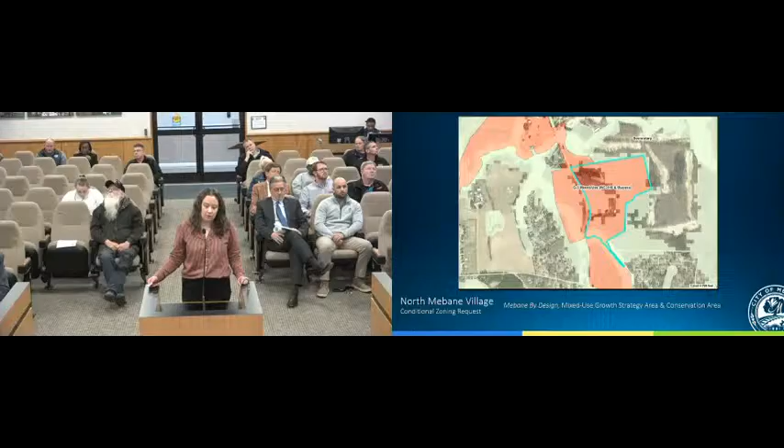Our comprehensive land development plan identifies the area in a mixed-use growth strategy area, which would support both commercial and residential components, and there is conservation area on the site as well. Our current comprehensive plan identifies conservation area based on contiguous forest cover and the presence of a stream, conditions that apply to this property.

As a conditional zoning request, a site-specific plan does carry with the rezoning, and that site plan is included in your packet with screenshots in this PowerPoint.

The planned unit development includes 192 townhomes, 36 single-family detached homes, and approximately 15,000 square feet of office retail space.

The private recreation, primarily associated with the residential component, includes pocket parks, a multi-purpose field, natural trails through area that's being preserved, and a pool and playground amenity. More than 23 acres of private open space is shown on the site plan.

Related to public recreation, the developer will be contributing to the public multi-use path network that's emerging in this area, connecting to the Potter's Mill development over the creek, to Preserve at Mill Creek here, and then also along this main road, continuing the multi-use path along North First Street.

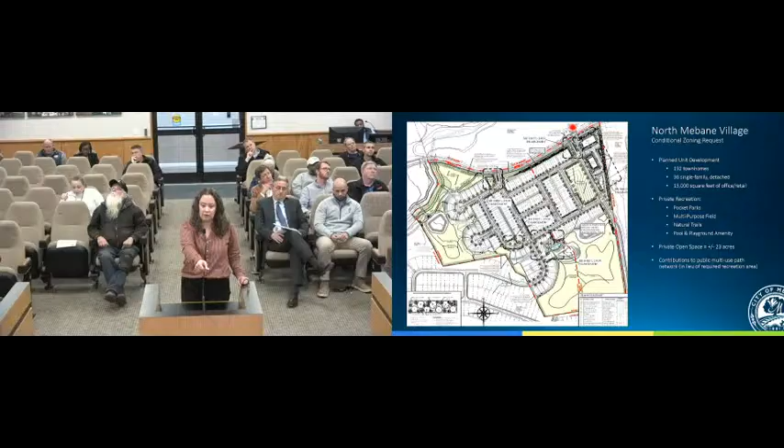There are conditions associated with the site-specific plan, including reduced setbacks for the sides of the townhome and single-family lots. The townhome setback is requested to be reduced to 3 feet. However, the applicant will maintain a 20-foot separation between the townhome buildings, consistent with our typical standards for standalone townhome developments. For the single family, the side setback minimum is requested to be reduced to 6 feet, and our standard is 10 feet.

Additionally, with the planned unit development, we have a standard that says the perimeter setback between the non-residential component and any adjacent residentially used property should be 150 feet. The applicant is showing a reduction in that; however, they are maintaining the required landscape buffer and are proposing to enhance it. Additionally, they have included a list on the cover sheet of the site plan that restricts the non-residential uses on that portion of the property.

Finally, the applicant is showing a 50-foot wide streetscape along North First Street, which is greater than what would typically be required. A traffic impact analysis was required of the developer, which was reviewed by city staff and also the North Carolina Department of Transportation.

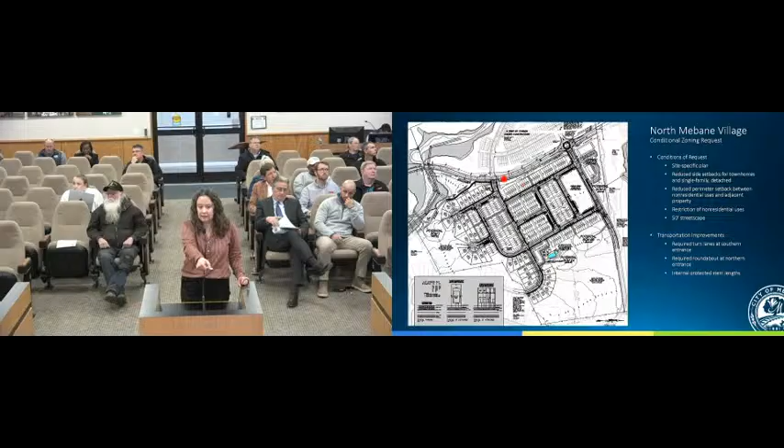They are required to make improvements at both entrances with turn lanes, both left and right, at the southern entrance, and then a roundabout on North First Street here at the northern entrance, which would be done in coordination with the adjacent developer for the Preserve at Mill Creek.

The NCDOT letter also includes some information about internal protected stem lengths, which would allow for driveways not to inhibit turning cars into the development.

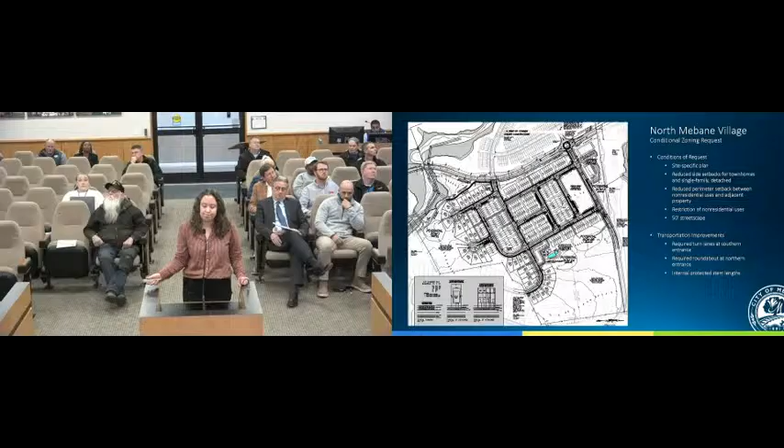Are there any questions for me?

So in the packet, under the streetscape, it mentions they're proposing a 50-foot streetscape, but it says the UDO requirement is a minimum 20-foot semi-opaque streetscape, but I think you mentioned 100. Can you clarify that for me? Oh, they're proposing 50 and our requirement is 20. If I misspoke, I apologize, but what's written in the packet is correct. So they're in excess of our requirement. That's correct, yes.

On side setbacks, you indicated they're wanting a reduction to 3 feet, but they will still maintain 20 feet — I guess 10 feet on each side of the property line. How's that monitored, just by the construction plans? With every townhome building that's permitted, we require a separation to be shown between the adjacent building. So we will look at it in construction plan review through the technical review process, and the planner assigned to review the zoning permits for each building would also be looking for that condition. It's a little unusual to hear a request for a 3-foot setback, but actually the townhome will be set back 10 feet from the property line. The property line will be different — it will be set back 3 feet from the property line, but there will be common area in between the two properties.

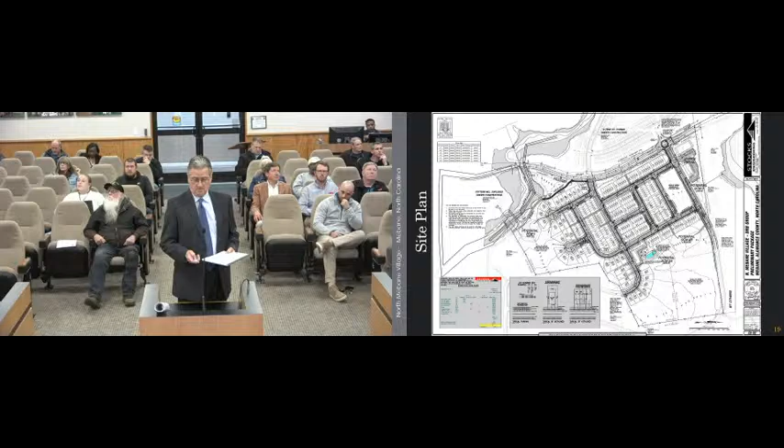So let's go through these. There's the site, which Ashley has already gone over, I'll back up to that one. This particular one, you can see where we're connecting the sidewalk and the multi-use path system here to Potter's Mill. That location was selected because the floodplain goes down right there, so we're building a bridge across that stream, connecting up through the development and out to 119, where it will reach back up with another one from the northern side of the preserve and ultimately out to the park. So it's creating a large link getting people from downtown out to the park. We're excited about that.

There's a fee based on number of units between the developers out there to get that section of it done.

As Ashley mentioned, this is conditional rezoning. Mr. Bradley, as far as your question about the townhomes, the townhomes are the same width apart, with a 3-foot setback off of each one, and the remainder of that section in the middle will be common open space. This helps the homeowners association maintain what's in between buildings. It'll be a landscape maintenance package for all the townhomes so they're maintenance free for the homeowners, all their landscaping, yards and everything taken care of. So it just helps the homeowners association manage between the buildings. That's what that one is.

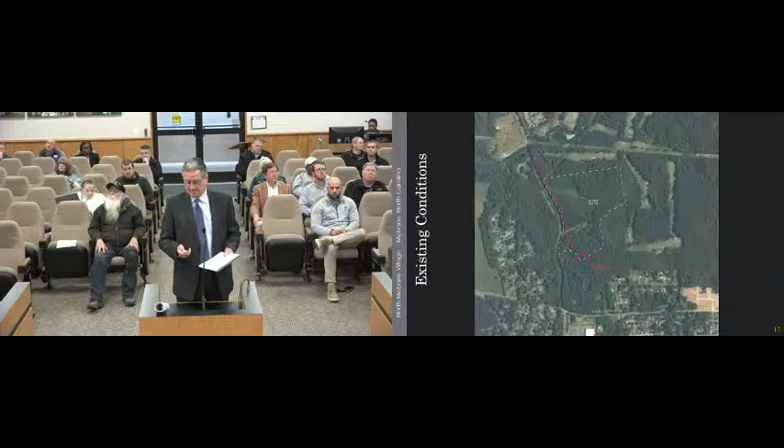We had a request to reduce the buffer width of a PUD, non-residential to residential properties on the outside. That was something picked up from the previous plan with a similar situation there, but again we've pared that down. We don't have as many uses available, so it's a smaller list, and some of the uses are restricted to help keep it more of a neighborhood service-oriented type commercial that will help, since there's going to be a lot of people coming out through the street to 119 North First Street.

As you can see by this plan, one of the other items listed in the comprehensive plan, besides being mixed use, is a conservation type development with higher density, but what that allows for is all the green space you see around the outsides. This is about an 8-acre plot where we're going to have some natural walking trails, tied into the amenity area, which will be a swimming pool amenity available to the townhomes across the street under the same HOA. Then there's another large section down here where we also have some trails that'll tie into the multi-use path as well.

We've got some pocket parks located one here, and there's another one here. The main open space in the development is a large green space here, which is larger than a football field. I think it's 180 feet wide—a football field's 160 feet wide—and it's over 400 feet long, so that's a very significant open space there.

We feel like if somebody comes along, if there's a coffee shop here or something like that, they can walk across the street and sit in the park area. So they would feel like those uses will go well together.

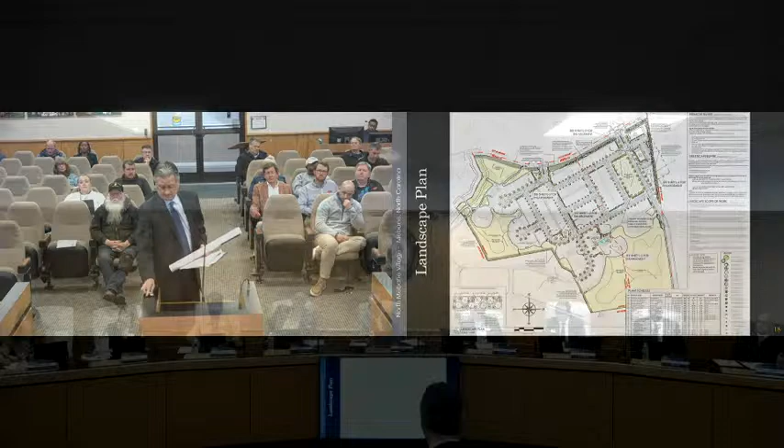So you referenced the restricted uses on the non-residential space. Are you able to give a quick highlight of what the allowable uses may be? I think there's still quite a few uses available, but we're looking for a coffee shop or a yoga studio, or might even be a spot for a daycare in there, or something that would be neighborhood service kind of uses that people can walk to from the preserve, or from Potter's Mill, or from across the street, or even Mill Creek, and be able to walk down there. It's not a great deal of mixed non-residential commercial, but it doesn't take much to get somebody interested in being able to walk to something that they can take part in.

So where's there a list? Yes, sir. Okay, that's what I thought I'd heard. Yes, sir. My name's Andrew Stocks, the civil engineer for the project. Our address is—I almost gave my PO box, that doesn't help you too much—it's 801 East Washington Street in Nashville, North Carolina.

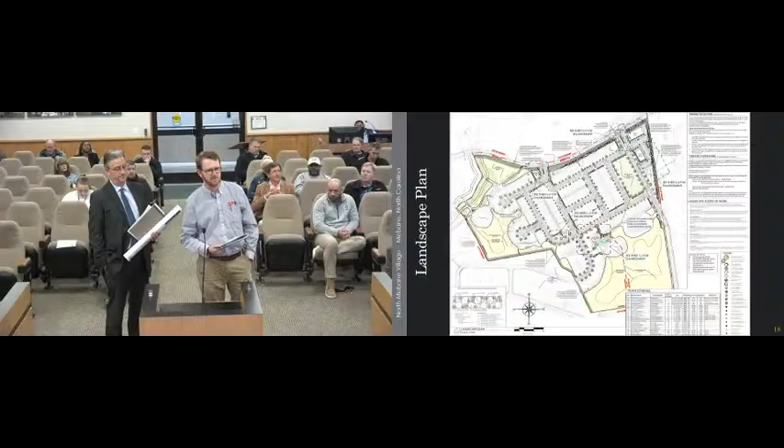On the cover sheet of the civil plans, I think there's one included in your packet. On the right side, there's a list of the uses. It says all permitted uses in the Mebane UDO 4-1-1 table are permitted use shall be allowed in the commercial tract as stated for the zone, except for the following.

I don't know exactly what's in that zone, but the ones we have taken out are family care home, temporary emergency shelter, caretaker dwelling, communication tower under 50 foot in height, home occupation, satellite dish antennas, athletic field, private club or recreational facility outdoor, cemetery and similar uses, elementary or secondary school, fire station or emergency medical service, communications tower, public safety, major utility facilities, minor utility facilities, small wireless facility, telecommunications, bona fide farm operation except commercial feeder and breeder operation, temporary portable storage containers, and yard sale.

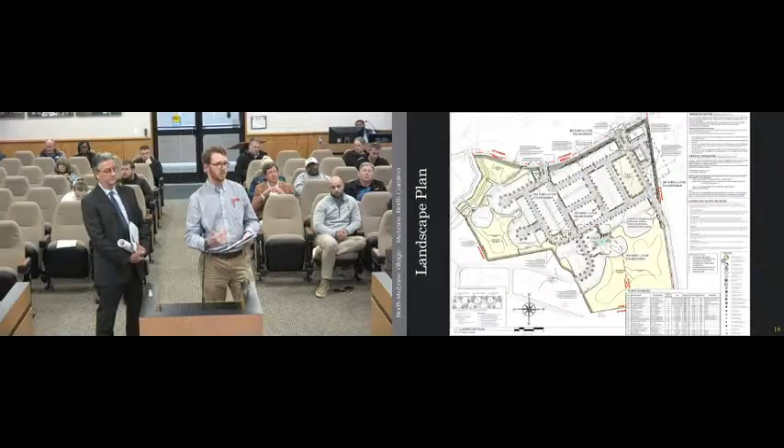So that was removed from what's currently allowed. Thank you. I'll just clarify that our planned unit development standards only allow for uses that would be permitted in our central business district, so downtown, to exist in this type of development. Great, that's helpful, thank you.

And then my other question, I know you referenced the watershed and the green space on the site plan. So you show—I get that you're going to have kind of a clear open field that's lined with trees over in that space right there.

But the space on the south side, and again over on the left of the screen, are the existing trees going to be left there, or is that going to be clear cut? The green you see on the plan is based off the preliminary grading plan. There are stormwater ponds here and here that are placeholders until we get to CDs, but we know we have to get stormwater management facilities in there. Everything you see in green outside of the grading limits line will be left undisturbed.

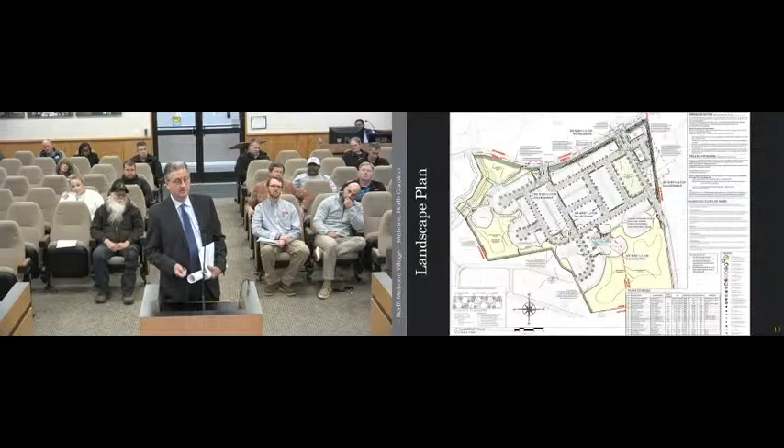Okay, thanks. Mr. Tate, have you done any other mixed-use development like this in other cities, or is this your first one? No, I've done quite a few - that's probably one of my niches. Got one in Elon right now, about 160 acres, with a hotel, 5-story apartments, and a grocery store - a large mixed use. Did one in Raleigh that's 400 acres, 5401 North in Raleigh, 2,500 units, 80 acres, with a commercial district in the center. Also Southern Village in Chapel Hill - worked on that one since 1995.

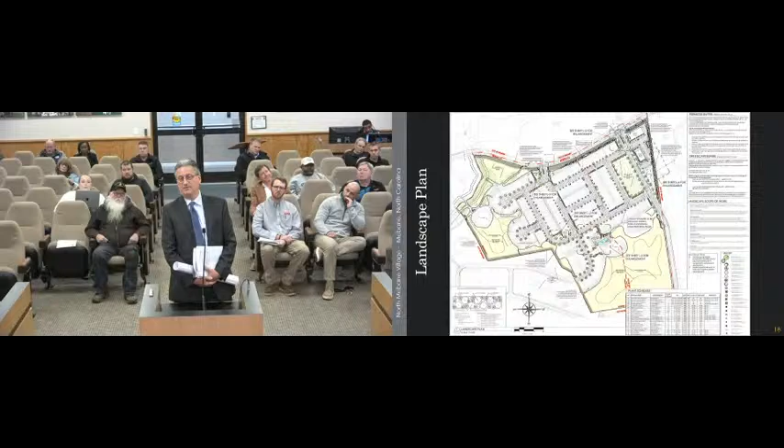And for our reference, 15,000 square feet - most of us don't think in terms of square feet. How much space is that? How many businesses can fit in 15,000 square feet? The new Dunkin' Donuts building out in Hawfields is probably 7,500 square feet. So it'd be 2 buildings about that size.

Okay, that's helpful, because I don't want to see a strip building there be vacant for years, or not be successful, not have energy behind it. That doesn't bring value to the city.

Are you doing anything in terms of outdoor seating or patios or that type of thing, or is that down the road? Those decisions aren't made in advance. We are showing patios on each end of the buildings, as with COVID people wanting to sit outside and get fresh air. At this stage we're showing patios where if it's a restaurant, deli, or ice cream shop, there's room outside to eat. Is that a voluntary condition or just a rendering? Just a rendering - we're trying to show the most logical way to set up those units.

Moving off the commercial to the setbacks - the 3-foot setback and stuff - how close will the closest townhome buildings be to one another? Not from a setback perspective, but how many feet from building to building? 20 feet, same as if it was a 10-foot side yard setback.

And then, how did you decide this makeup of single family versus townhouse versus commercial? Why didn't you do more single family, or all townhomes, or no commercial at all? Can you talk through the thought process behind that? Well, the perimeters where we're butting up to other residential units - we've softened that with the single family units on the south side and the east side.

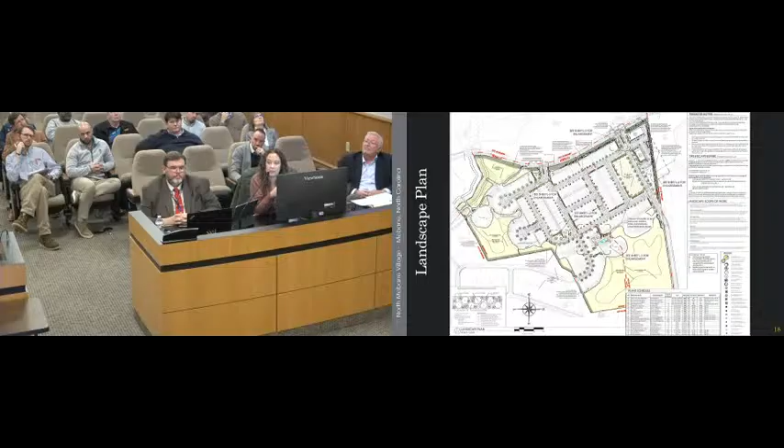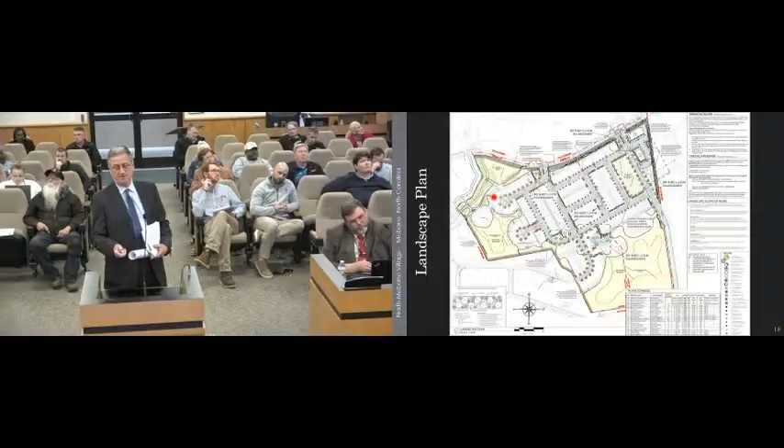If I may, the sewer is down here along the creek. So it makes sense for us to develop the southern portion of the site first, because that's the way the sewer is accessed down here.

If we were to get to that street first, then we would build it, if we got there before Preserve did, but I'm not sure who's going to get there first. There are assurances with the condition that it's going to get built. Building on that, do you have additional questions?

I have one, but on a different topic. Do you want to follow up? Yeah, I want to follow up on that.

Kind of building off that, it sounds like first come, first served to get some buildings put up right there. Do you foresee any issues, pitfalls, or hurdles in regards to all the development going on in this area? Will there be any, I won't say fighting, but situations where certain things need to be done before certain things are put in the ground?

Do you need additional roads? Do you need additional developers to be working on their part of the development? Or should everything be pretty autonomous and come together quite well with the other developers?

We have to tie into Preserve here in our phase one, so we're working in conjunction with them. We're lining up with their streets. They're not having to get any kind of sewer through us.

Their sewer is going to come out down here, so they're kind of autonomous in the way they develop that. And I think the way we all worked together to come up with the agreement for the multi-use path, I think everybody's in sync with doing those all together.

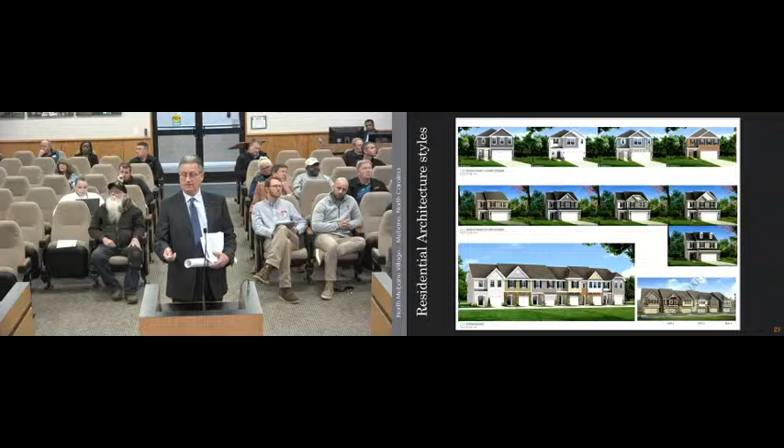The units that you see on the bottom here are sort of the same series that's across the street. But you'll notice the 26-foot wide units are placed on the ends of the buildings, so there's variation between this particular unit and the ones across the street to give some variation in style, because we're adding the larger ones on the ends.

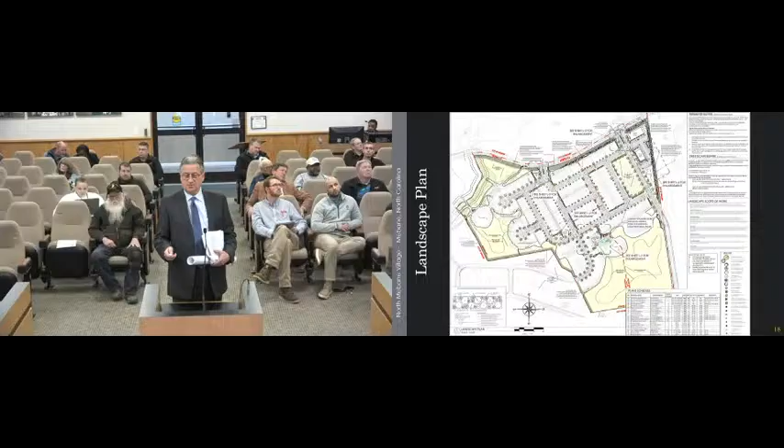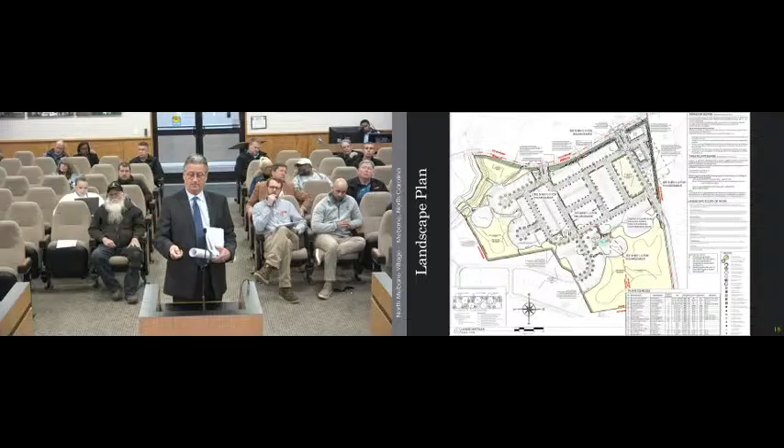Going back to the layout, we're trying to orient these things in different directions so that as you go through the neighborhood, there aren't long continuous streets of product that just seem to go on and on forever. The street here could have gone all the way through, with all those units lined up on each side. But I tried to turn them perpendicular to each other, to give a terminating vista at the end of a street, but it takes away from what I call the monotony of just lining everything up facing each other.

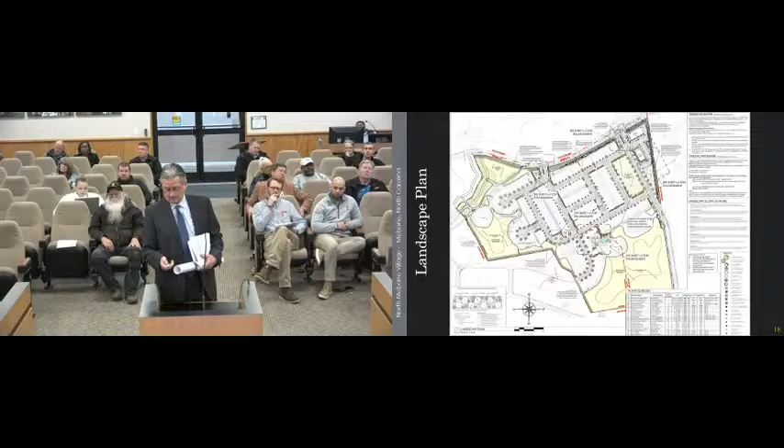And you show on those drawings different facades in the units in a single building, and that's what you plan to do. There'd be some stone, some brick, some different awnings, et cetera.

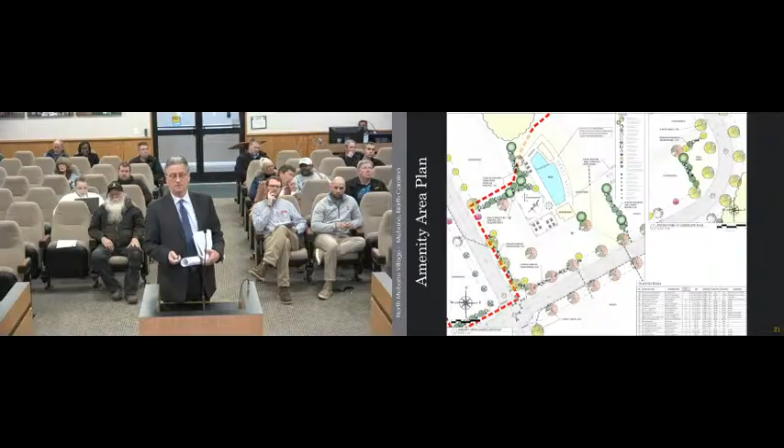Your amenity package was really nice, the pool and stuff. When is that planned to be built in the scheme of development? After 50 houses, or when are you planning to do that?

Let me get back to the phase map where you can see... It's a little bit hard to see on this map, but that is located within phase one.

Okay, good. And this might not be the final design, this was taken from another project, but it will have a pool, a cabana house, a playground, and parking. Just the final shape of that pool is not finalized.

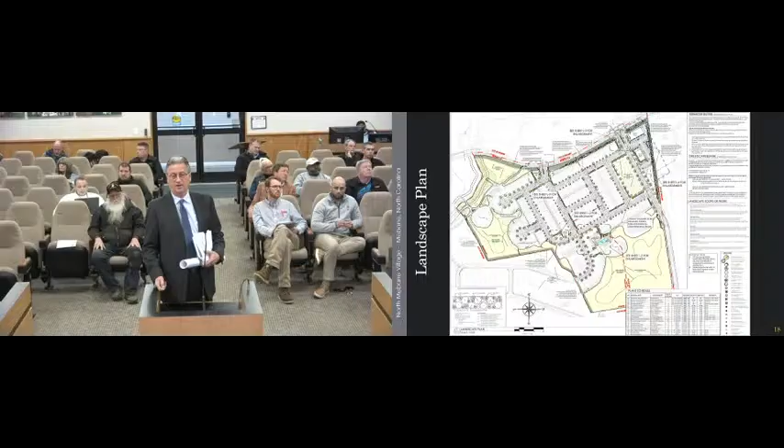One of our concerns is when you push amenities to phase two, you end up with a lot of people moving in with no amenities. So the quicker you do it, the happier people are, and the less concern from the council. So that's good, you're going to do it in phase one.

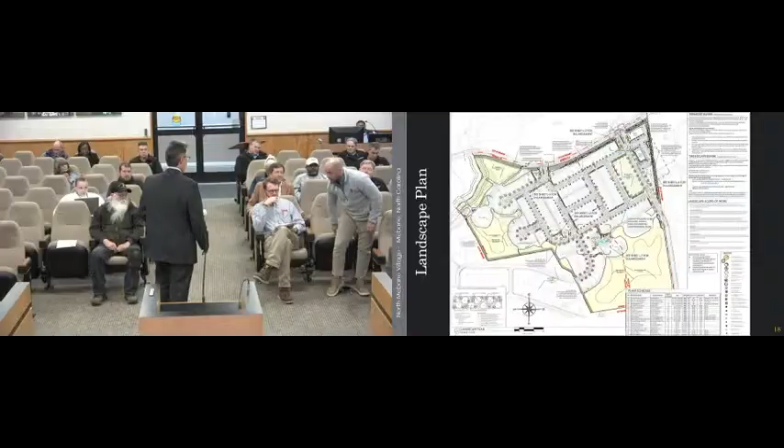Hi, Jackson McConnell. I'm the land entitlements manager on this project, DRB Group, 1101 Slater Road, Durham, North Carolina.

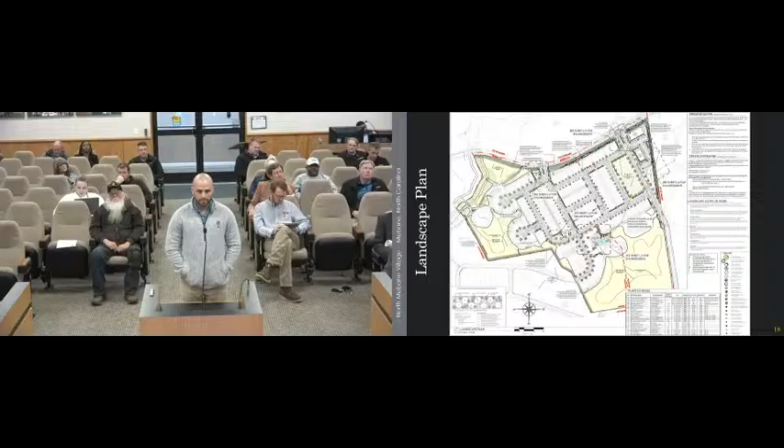The price point for this is really going to be driven by the market at the time, so it's kind of difficult to know exactly what those will be going into it. If you're looking for an example, I'd say look across the street to North First Street. That's a kind of sister development to this one and will drive a lot of what the prices for this development's townhomes will be. Obviously, with the 26s, those will probably be set a little higher, as well as the 30s beyond that.

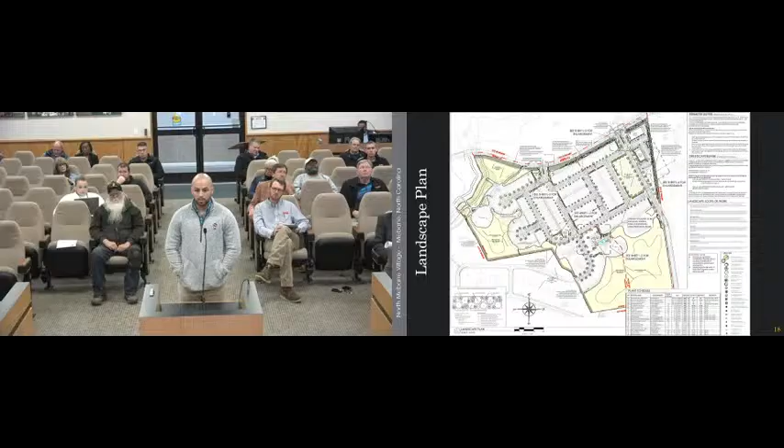Can you give any guesstimation what you're looking for right now? Off the top of my head I don't have those numbers, but if I had to guess, somewhere in the 300s and 400s, probably, for the townhomes.

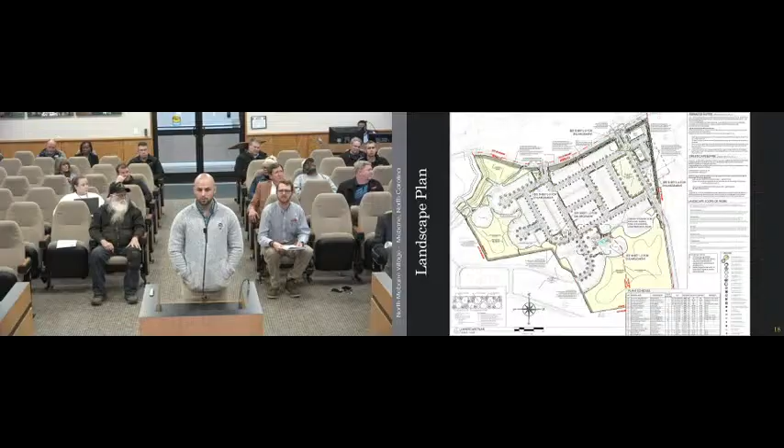Starting around 325 and going north for the 20-foot units. And I guess you'll be the local builder realtor? Yes.

That's all for the house prices. Is the development across the street that y'all are doing now, that Matt's doing now, tied into the roundabout? Yes, sir. Okay, so there'll be basically three developments tying into that, the Mill Creek one, and yours.

Not sure if it would be you, but these are all going to be public streets, right? We have some similar townhomes in town that use an alley. Yes, these are all going to be public streets.

Awesome, thank you. Do you have a map showing that aerial view so we can see it all together, how it plays into one plan, showing all three developments? Aerial or overlay or something. Your phase plan looks like it might show a little more than that particular slide. Phase one.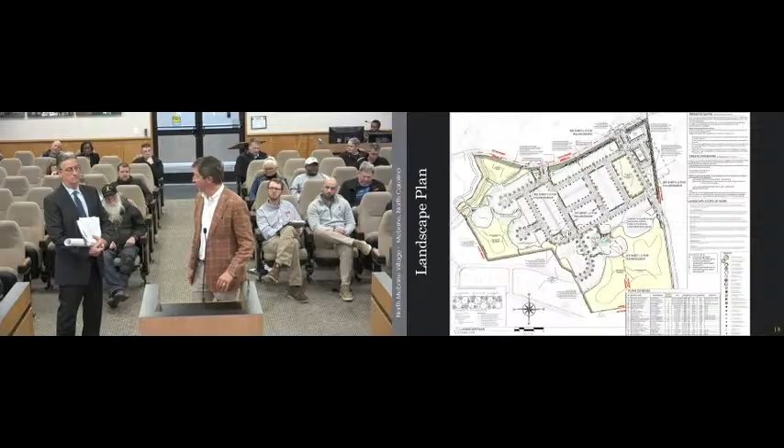There's plenty of parking—I think we got about 75 spaces—so we could accommodate a small retail use, whether it be some kind of grill and/or ice cream shop, like he mentioned. That roundabout's going to see a lot of traffic and visibility, so we do believe it's viable, and 15,000 feet is probably about right. I do think it's fortuitous that these pieces are coming together at the same time.

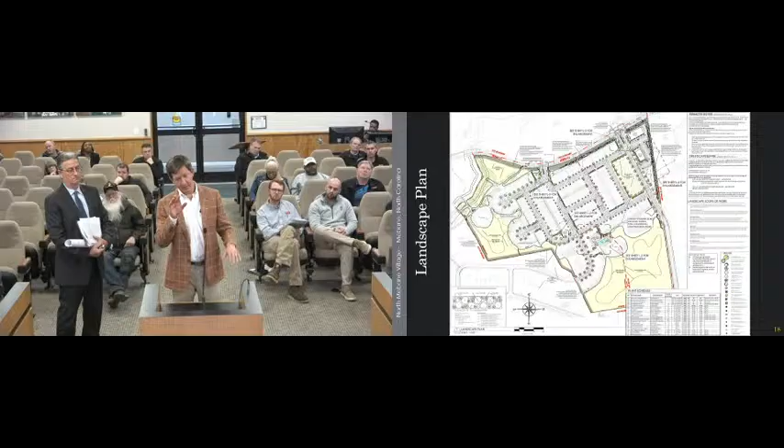You've got this beautiful vision out there about a Greenway to connect all those parcels in that watershed, and the residents can easily get into downtown, which I know you want to make vibrant. So it's fortuitous that we're only dealing with really 2 or 3 parties—Lennar, Dan Ryan, and myself—because that simplifies things a whole lot.

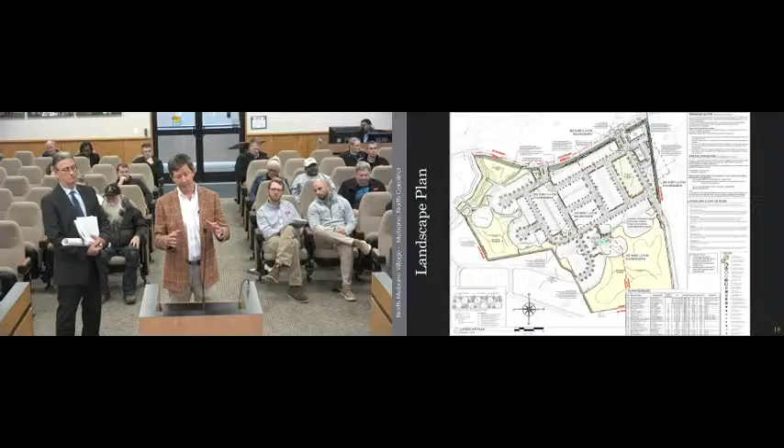I compare it to—I always use the analogy—have you guys ever been to Ocean Isle Beach? One man developed all of Ocean Isle Beach, so it's very consistent. It had a lot of controls, where you can go to other places and tell it was done over decades and decades. So it is good that we can all meet, have these agreements that can be enforced and built, and the vision can come to fruition.

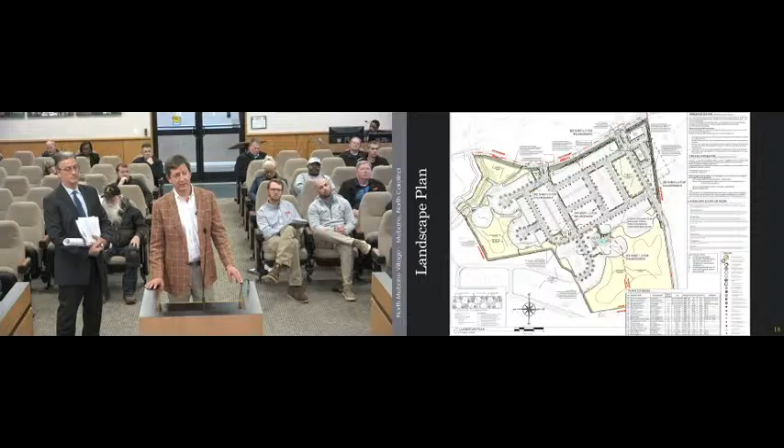We all had kind of an upfront knowledge of the interconnectivity of the greenways and the streets. We just talked about the roundabout last week quite a bit.

I did not meet with you guys beforehand, but I'd like to compliment you on a couple of things. It's nice to see a development come before us where there's not payment in lieu of recreation space, and not a creation of green space using drainage, swamp, and floodplain. I'd like to compliment you on the interconnectivity. I think that's been a great plan for the entire area, and also the green space and recreation.

On the recreation, particularly the pool, I assume that will be for this development and the one across the street. How about the trails? I know one of them connects on the southeast corner to the greenway passing through the property. Will the trails connected to your amenities be accessible by the general public, or just the residents?

They could be. They're designed for this community, but I'll let Tony speak to that—he's the man to thank for the beautiful design, and he did a wonderful job. So they are on private property, maintained by the HOA. I don't know if somebody could walk through there, but I think as long as they're being nice, everything would be all right. If somebody's going through making trouble and tearing things up, then they'd probably have to have something done about that.

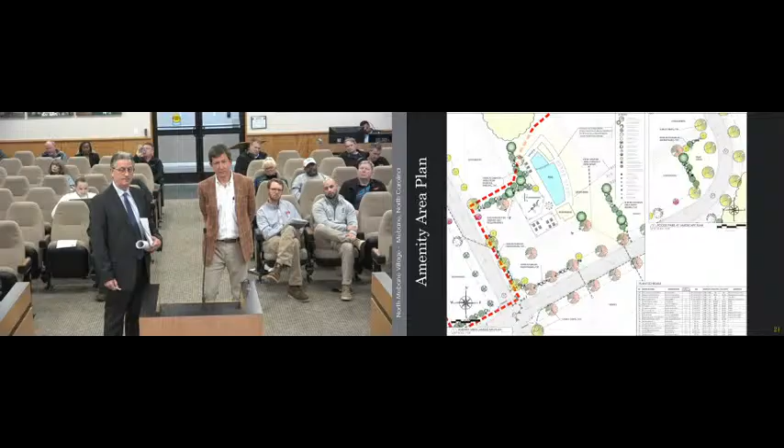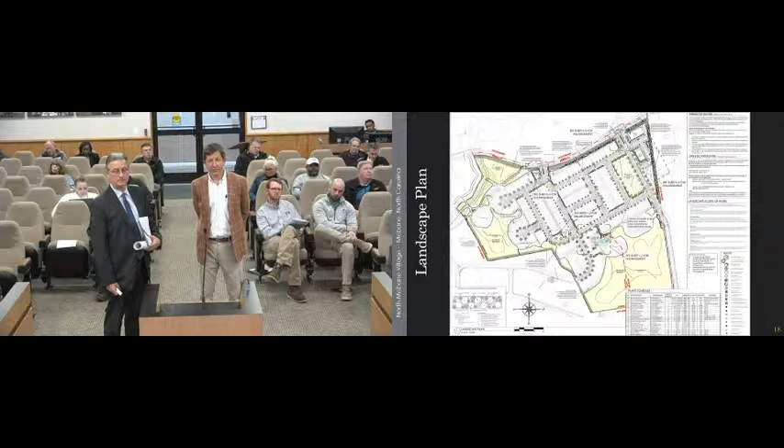Talking about the commercial part—not only the project across the street, but the two new projects going on now, and then that long drive coming out of Mill Creek—there's no telling how many thousand people are in that area. We could add it up real quick. That would be a hot commercial spot, particularly for a coffee shop and a clinic and those kinds of things. In our conversations with you, I think we all wanted some commercial spots out there, so that's very well done.

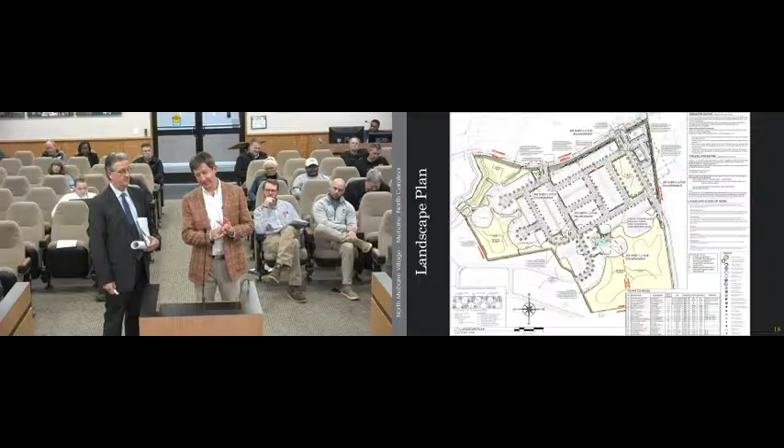It'll be a really nice lifestyle. There's a lot of open space with very little maintenance—I'm kind of jealous myself, since the place is maintained by the HOA, the unit. It's just go enjoy the open space and be in by dark, for the kids, right?

Just a question for clarification. When the final home is built, will the streets be complete at that time? I'm looking at your phase plan, but when you build the final home in the single family portion, will you go ahead and put the infrastructure in and have the streets connecting? What's happening a lot of times is residents will say the streets are not complete, with manholes still standing or showing. I understand that when you're trying to build a home, at what point will you have the streets completed?

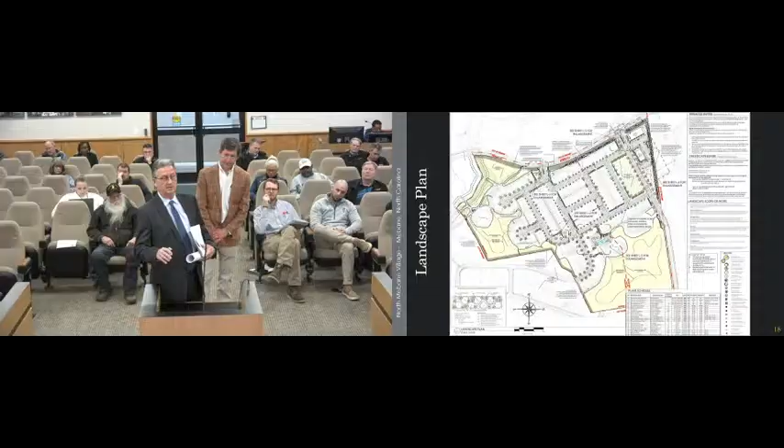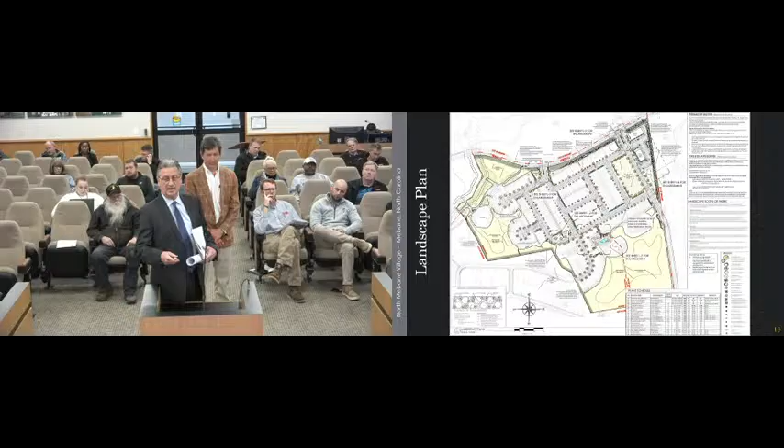Top coat. That's really done because, as projects are developing, sometimes you have failures in the street or somebody has to come back and redo a water line connection. If you put the asphalt down too early, you're going to have a lot of cuts in the asphalt, and then the city of Mebane is not going to take it over. You'd rather have a nice, clean asphalt street, so we try to let the construction get out of there and get the warranty on the fresh asphalt instead of having to open cut it all the time during construction.

Thank you. Any other questions from council? Quick one—can you talk to me about the crosswalk? Will that be your responsibility or another developer's responsibility? I'll let Andrew speak to that. Yes sir, what's your question? The First Street crosswalk near the roundabout.

We talked about this a lot with the approval of the plans across the street, because ultimately they're the ones going to be coming across more often than not. On those plans, with the approval of the North First Street project, was to provide a high visibility crosswalk through approval with DOT. That's going to change a little bit with the roundabout, with just the location of it and how close it is. So that'll be incorporated in the roundabout design, but it will be approved by DOT as a high-vis crosswalk.

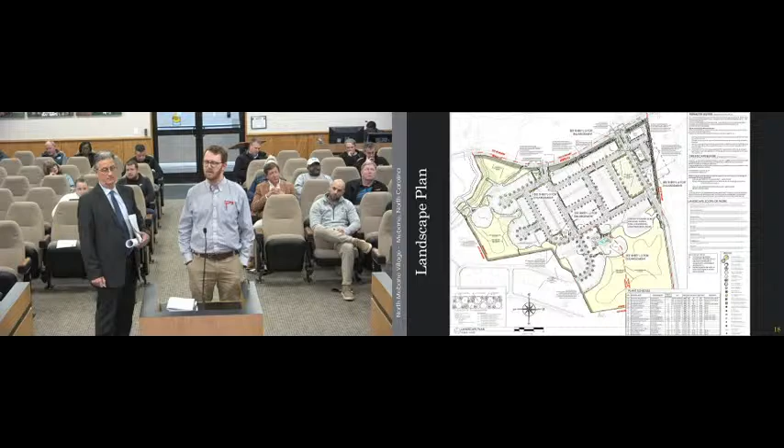What is considered high-vis, educate me please. I think it's just the crosswalk signage leading up to it. With it being at the roundabout, that'll also be a lot better for traffic calming. You've got people coming into it, there's going to be more reason to slow down than just seeing the signs and the striping. But it's more of the reflectivity of the signage, the striping, and the asphalt.

And no lights, no flashing lights or anything like that? No, we're not proposing any flashing lights or pedestrian signs like that. Okay, thank you. And there are turn lanes on 119 into it, okay. Yeah, thank you, I thought I saw that, I just wanted to make sure.

Any other questions? All right. Does that conclude your presentation? All right, it is a public hearing. Anybody in the audience would like to speak?

State your name and your address and who you are, sir. Tom Boney with the Alamance News, 114 West Elm Street in Graham. Could you go back, there's a couple of slides, one of the early ones I didn't quite understand, before this, the part where she gave her presentation, color coded?

I don't understand, in the description, the part that says R8CD, on the left side, presumably the western side of 119 - is that part of this project or no? It's by the same development team, that's the North First Street Townhome project that was approved in July of 2022. Right, it's the one they refer to as across the street, and it's all townhouses. Correct, correct.

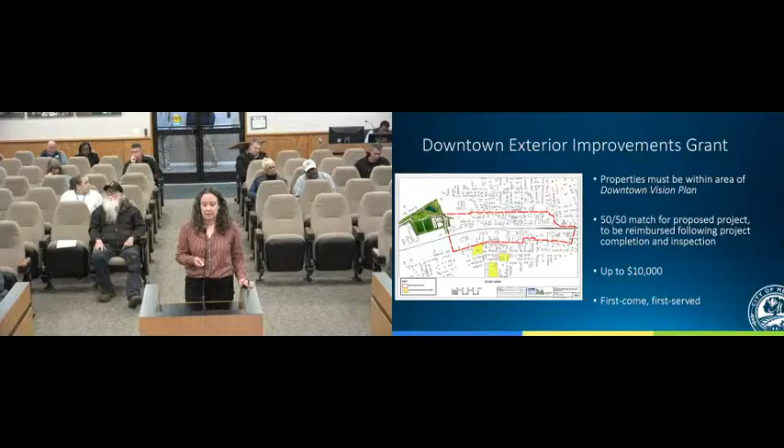So you all received an overview of our grant program at last month's meeting when you awarded approximately $7,000 to the Mebane Business Association, but I'll just quickly review. You did allocate $50,000 in the current fiscal year budget, and we are still accepting applications. Applicants must provide at least 2 quotes, and if they are a tenant, must have documented property owner approval. We do require any offsite commitments to have written permission, particularly from the city if it involves our right-of-way or sidewalk. Any changes to the application after you make a decision to award an applicant must be pre-approved by staff. The properties must be within the downtown vision plan area, and it is a matching grant program, so we will reimburse an applicant 50% of qualifying expenses up to $10,000. We consider facade improvements, historic preservation, art, and outdoor seating when reviewing grant requests. You have three grant applications before you this evening.

The first is 117 West Clay Street, the location of Big Oak Restoration. They have the property owner in conversation about some pretty serious repairs needed to the brick and mortar and how the roof is attaching to the structure. This would be a request for the maximum matching funds of $10,000, made by the property owner, Tammy Scarlett.

Another request is from the property owners of 126 West Clay Street, the Gourmet Grove. They are looking to replace the front door, the front and back windows, and possibly the awning. This would be a request for just over $6,700.

Any questions? Are any applicants here that might want to talk or give the impact of these grants? Okay, never mind. My bad. Oh, yeah.